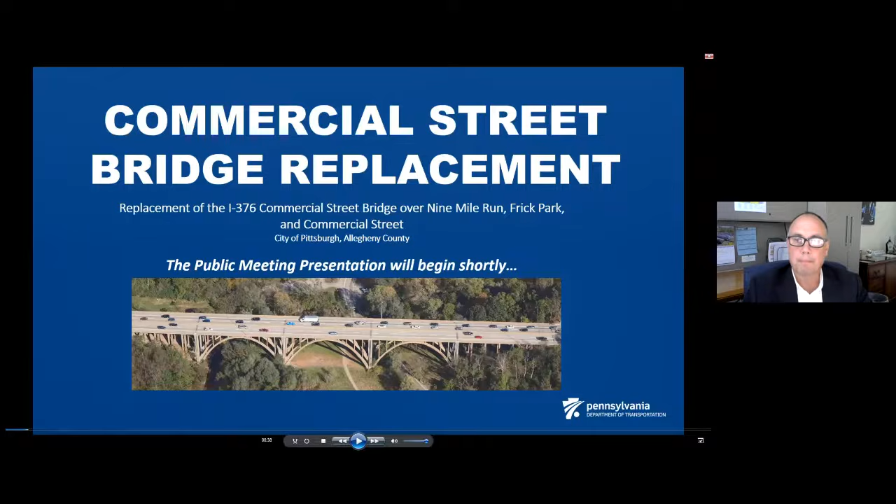Thank you, Jason, and thank you everyone for attending today. My name is John Myler. I'm a Senior Assistant Construction Manager with PennDOT District 11, and I will be overseeing this project throughout construction to ensure it's built properly to our standards and specifications.

I also want to introduce you to two other speakers you'll be hearing from today. We have Nick Burdett with HDR, our designer of record for the project. Nick's been involved in this project from the beginning, and he will continue to be involved throughout construction to answer any questions or concerns we may have when we're actually constructing the project related to the design details.

You will also be hearing from Michelle Olszewski. She's with S&B USA, who's our prime contractor for the project. Michelle will be giving you some more specific details about the construction activities that will take place on the project and the timeline and schedule for what those will be throughout the project.

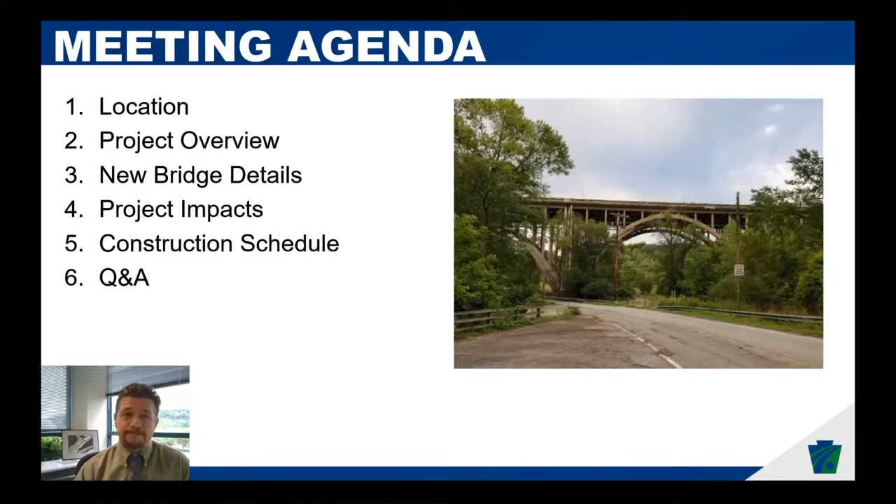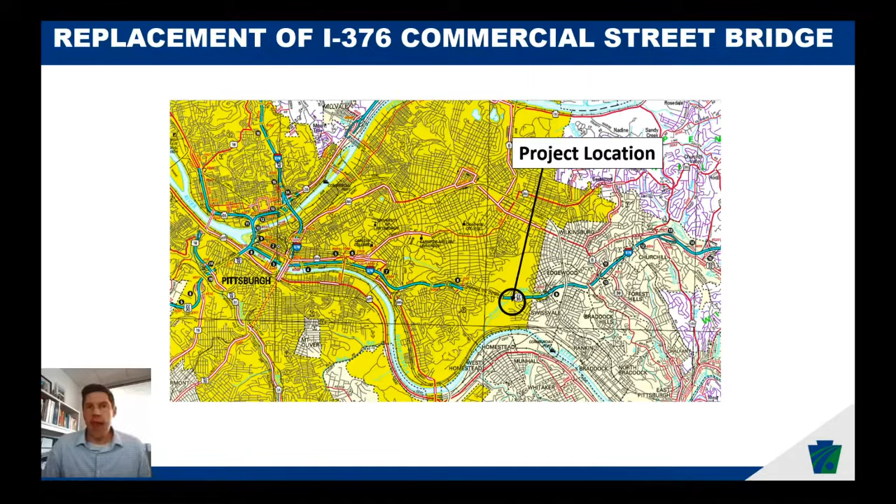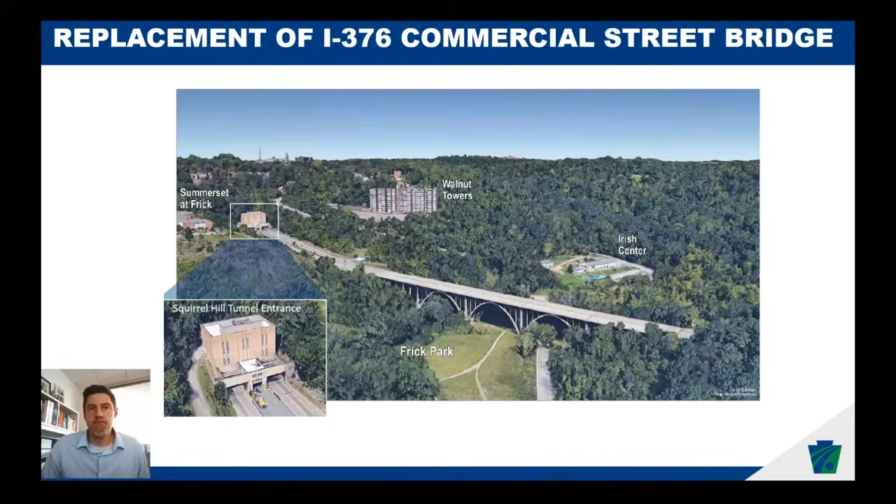I'll just provide a brief overview of the existing structure and why it's being replaced as part of this project. The existing 3-span concrete arch bridge you see here was completed in 1951, making it 73 years old. The structure carries the interstate with approximately 100,000 vehicles per day crossing the bridge. The bridge cannot carry permit loads on the interstate, so it's a real limiting factor for permit loads on this major route.

Due to its age, deterioration is accelerating and recurring maintenance costs are getting prohibitive.

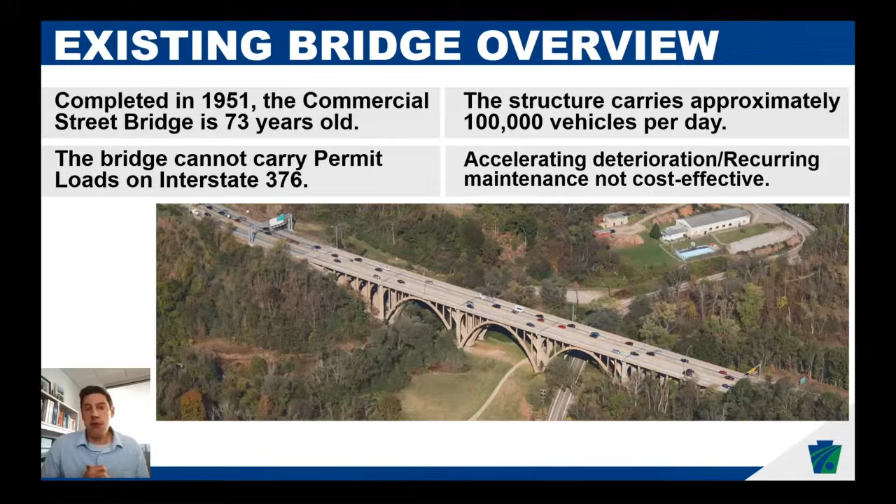The existing Commercial Street Bridge was built between 1948 and 1951. In the year 2000, it was deemed individually eligible for listing in the National Register of Historic Places by the Pennsylvania Historical and Museum Commission, due to its technological significance and aesthetic design. As a result, PennDOT has closely coordinated the proposed bridge replacement with the State Historic Preservation Office and other consulting parties. PennDOT has also coordinated with the city of Pittsburgh for tree restoration, and our project team has developed a landscape plan to ensure that Frick Park's setting is enhanced by the project. Finally, PennDOT has collaborated with the Department of Environmental Protection throughout design and will continue to do so during construction, to make sure required earth disturbance and stream encroachment mitigation measures are implemented to maintain and enhance the environmental quality of the stream and surrounding areas.

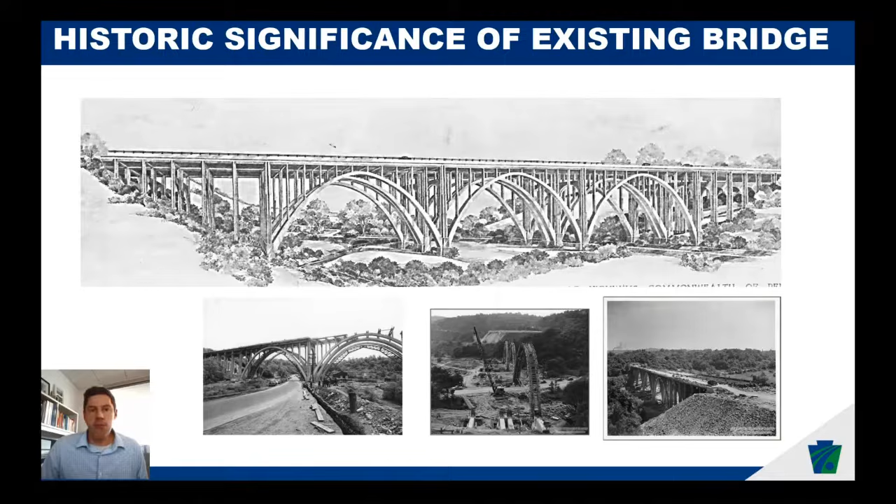As the team began to look at replacement of this significant structure, limiting impacts to traffic during construction was, of course, very high on our list. About 100,000 vehicles a day use the bridge, and how to limit impacts was a key consideration. In the end, the team looked at two different construction methods: staged construction as well as slide-in construction.

The idea with staged construction is building the new bridge in partial widths and shifting some traffic onto the bridge as we build it. For example, we might build a third of the new bridge next to the existing bridge, then demolish half the existing bridge. We then build another third of the new bridge, demolish the rest of the existing bridge, and finally complete the new bridge with another third of width.

As you can imagine, this required a great deal of shifting traffic and years of impacts to traffic. On the other hand, we looked at sliding a new bridge in. In this scenario, a new bridge would be built south of the existing bridge, fully constructed on temporary foundations, and then during a full closure of the interstate, the existing bridge would be demolished and the new bridge slid into place. Ultimately, this is the method that we decided on.

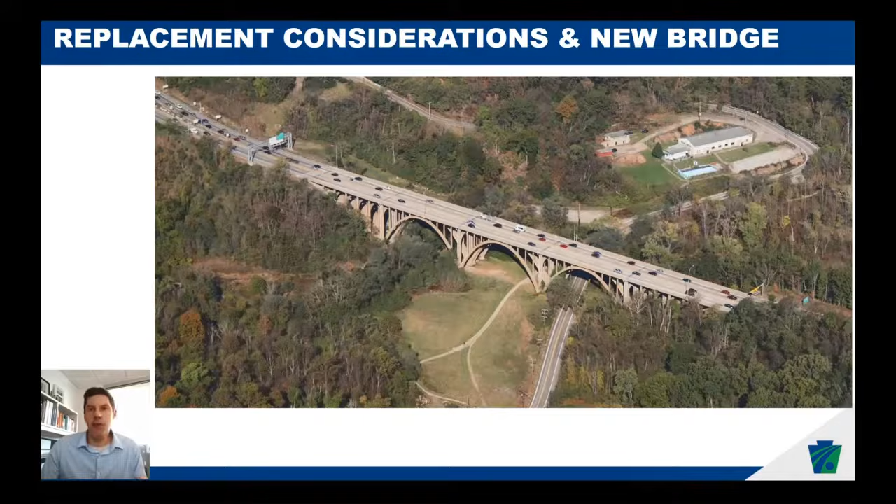In addition to the slide-in method, we evaluated a total of 6 different bridge alternates. Based on strong public desire to maintain an open arched appearance and the need to be able to slide a bridge in, we ultimately selected this arched delta frame structure for the replacement bridge.

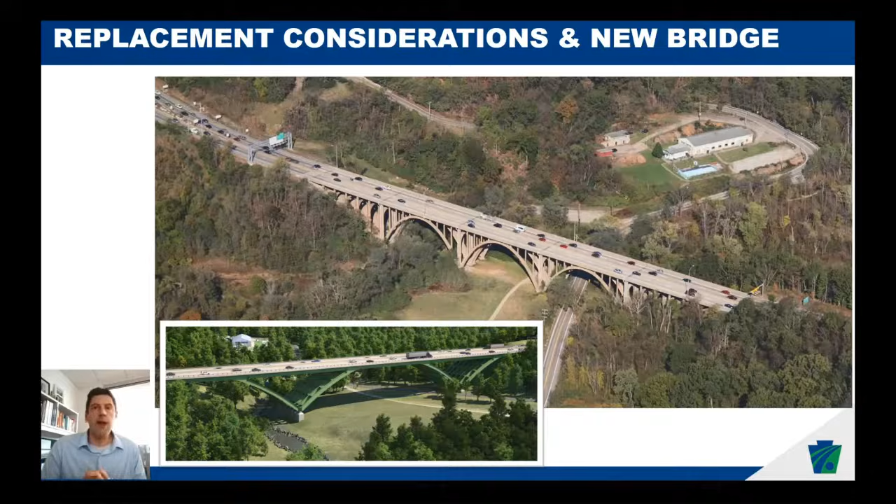I'll now say a little bit more about the slide-in construction method to help understand this method.

As I mentioned, a determination was made to proceed with a slide-in construction methodology. This was the overwhelming preference based on public input received through public and stakeholder coordination meetings in November of 2019, as well as input received through approximately 200 responses to an online survey in early 2020. It was decided to move forward with the slide-in method because of its lesser overall impact to parkway travel patterns and associated traffic disruptions.

So, to walk you through highlights of the slide-in construction method, the first step is to build the new bridge, shown here in blue, completely on temporary foundations south of the existing bridge, while 2 lanes of traffic are maintained in both directions on the existing bridge.

Once the new bridge is ready to be slid into place, the parkway will be fully closed in the summer of 2026 for approximately 3 weeks. Using a combination of conventional and explosive demolition, the existing bridge will be removed and the new bridge slid into place on new foundations.

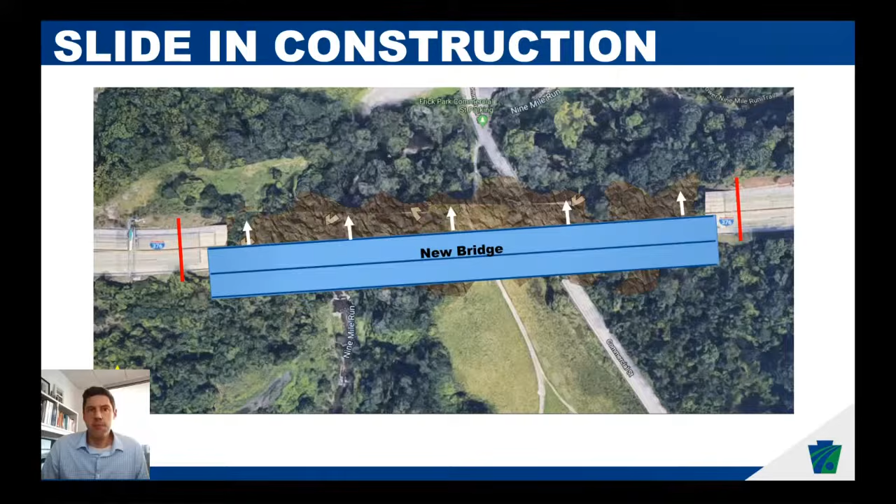Once the new bridge is tied in at both ends to the existing roadway, traffic can be reopened with 2 lanes of traffic again moving in each direction across the new bridge. As a final phase, the debris beneath the bridge will be removed and the site restored.

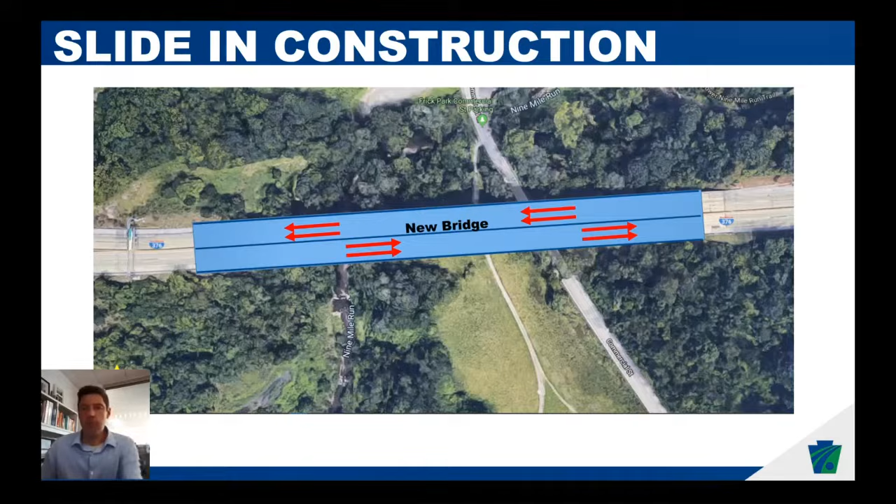Building the bridge to the south will have limited impacts to some of the elements underneath the bridge. This image shows a temporary realignment of Commercial Street under the interstate bridge, which will be required for up to 2 construction seasons due to the need to build one of the temporary foundations within the existing Commercial Street pavement area. The 9-mile run trail beneath the bridge will remain open as much as possible, but portions of the trail will need to be temporarily relocated during construction to ensure the safety of the Frick Park trail users.

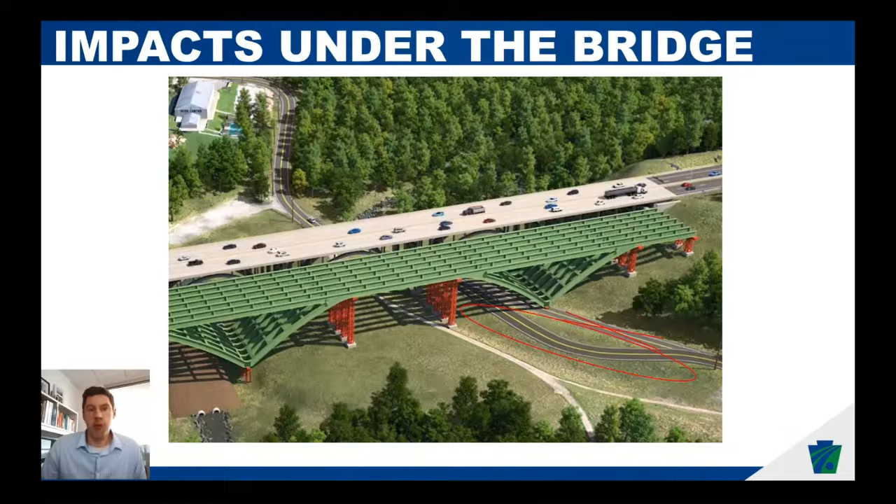Before the bridge is slid into place, there is some important work on both approaches that is also included in this project. The roadway widening on the approaches will require some temporary lane closures to allow the construction of a large retaining wall southwest of the existing bridge on the eastbound side, as well as the foundations for 2 new sign structures. However, the overall impacts and traffic disruptions to the traveling public for this work will still be far less through the proposed slide-in construction process.

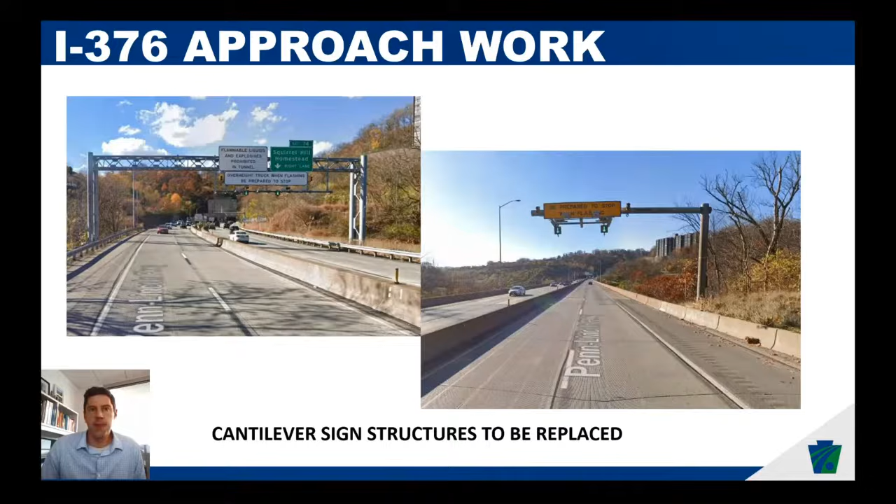PennDOT has prepared a brief video that will walk through in more detail the anticipated construction sequence for this unique project.

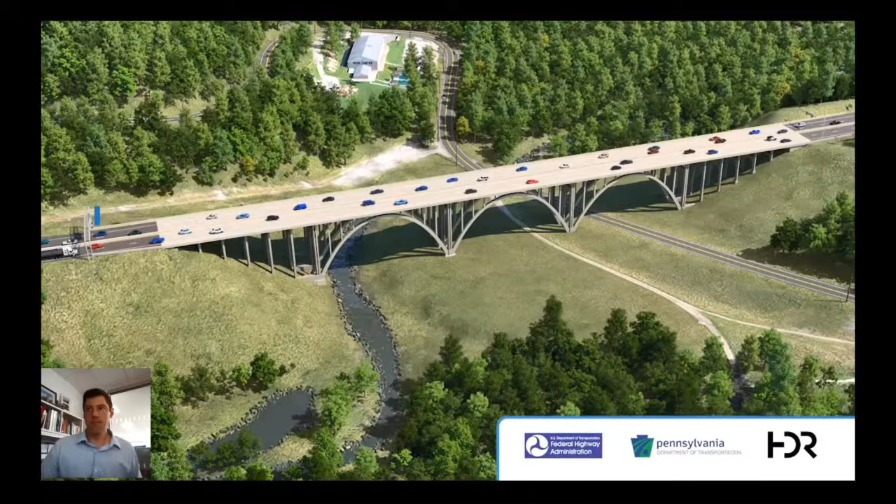Here you can see the bridge just to the east of the Squirrel Hill tunnels, crossing over Frick Park, Commercial Street, and 9 Mile Run.

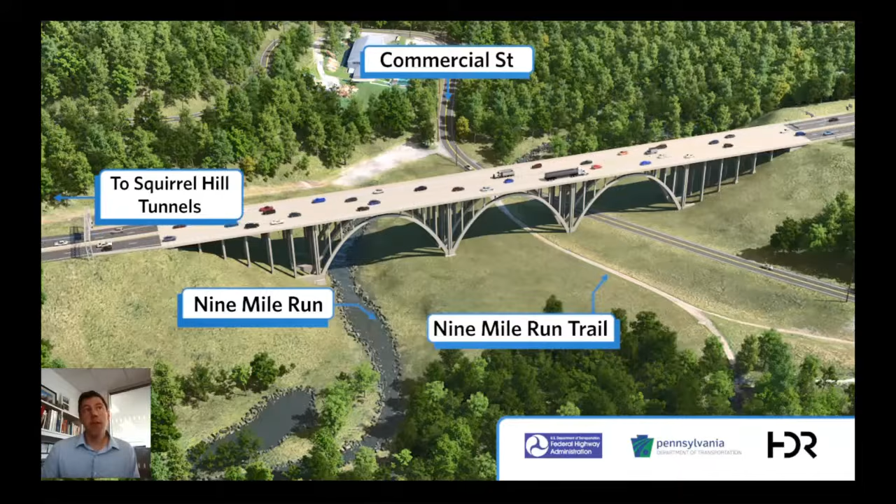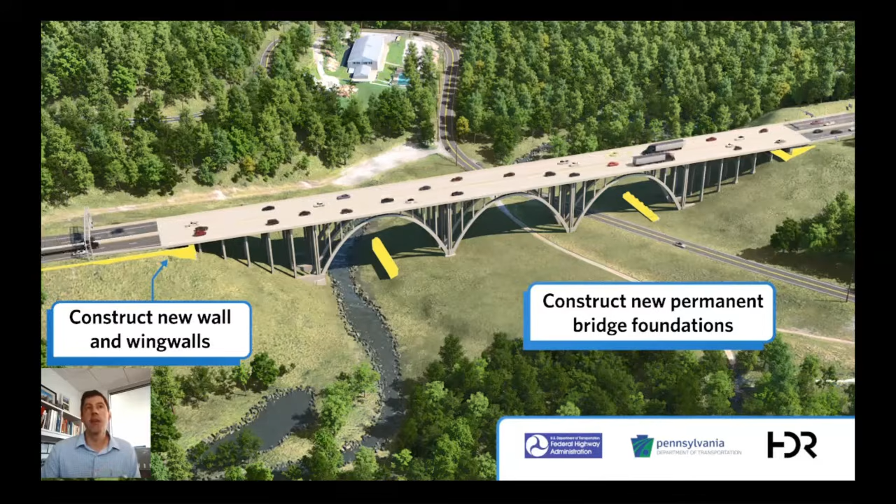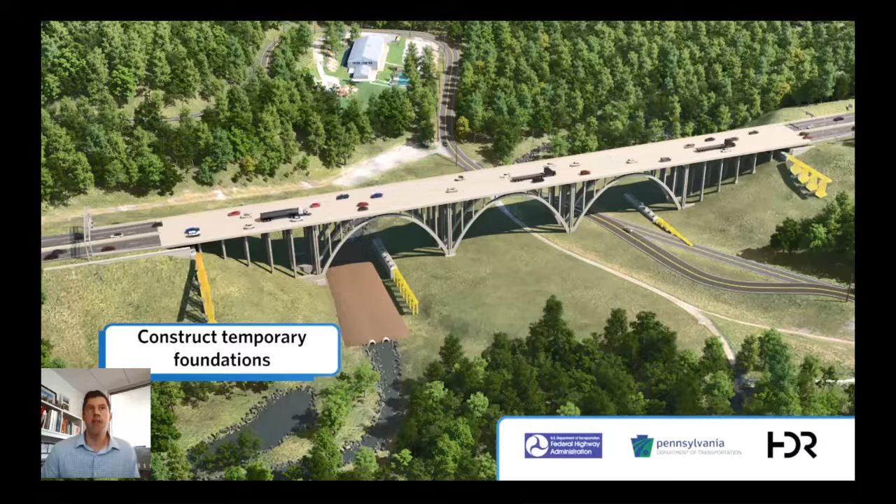Early construction tasks include building new foundations and wing walls beneath and next to the existing bridge, as well as a temporary causeway to access both sides of 9 Mile Run while protecting the stream from debris and pollutants. As mentioned earlier, Commercial Street and the 9 Mile Run trail will be realigned where it passes beneath the bridge so it doesn't conflict with the temporary foundations.

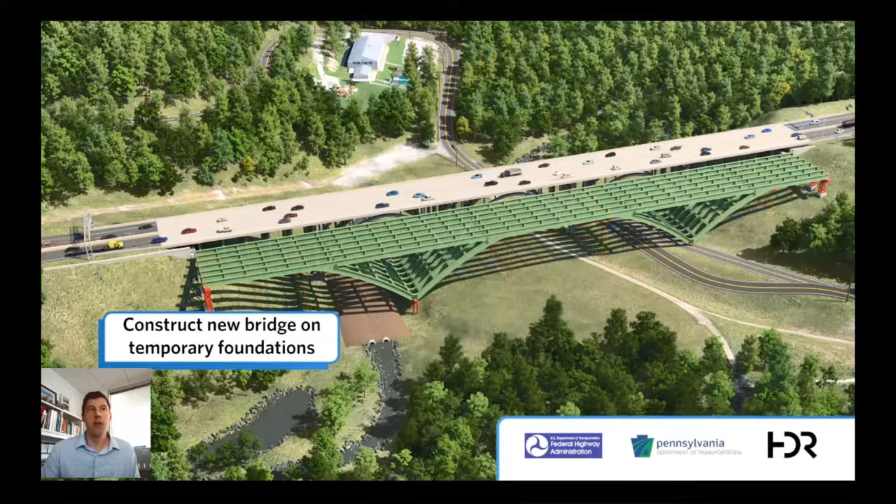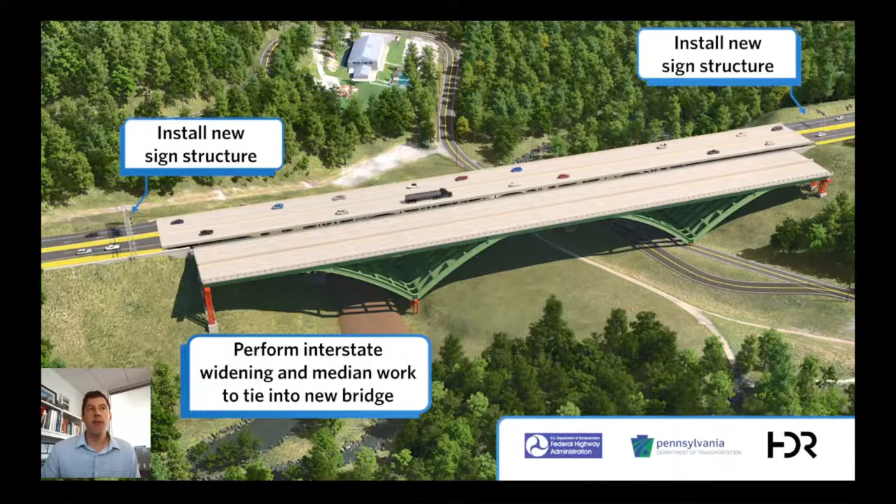The new bridge will then be constructed on the temporary foundations, first the steel as shown, and then a concrete bridge deck will be poured on top. The new bridge will have wider shoulders to meet current design criteria, and to accommodate these, wider pavement and overhead signs will be required on both ends.

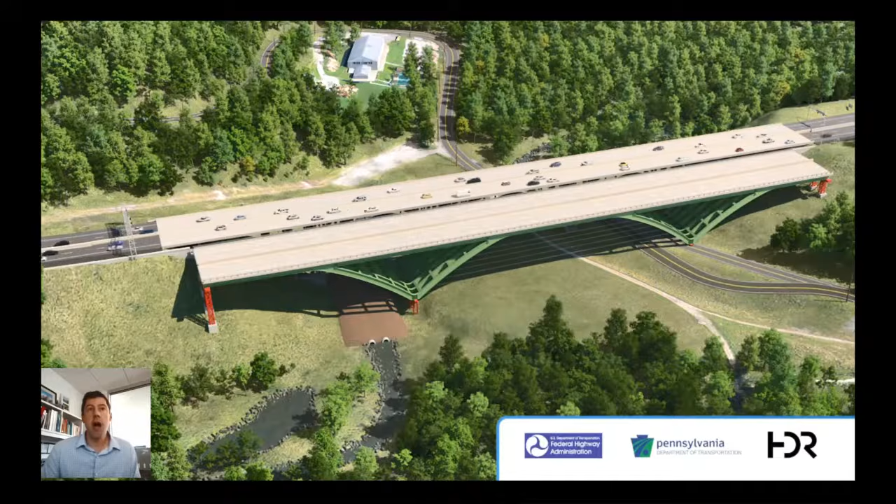Commercial Street and the Frick Park Trail below the bridge will be closed to vehicular and pedestrian traffic in advance of the complete closure of the parkway. Installation of temporary tie cables and bracing is anticipated to stabilize the bridge during the slide.

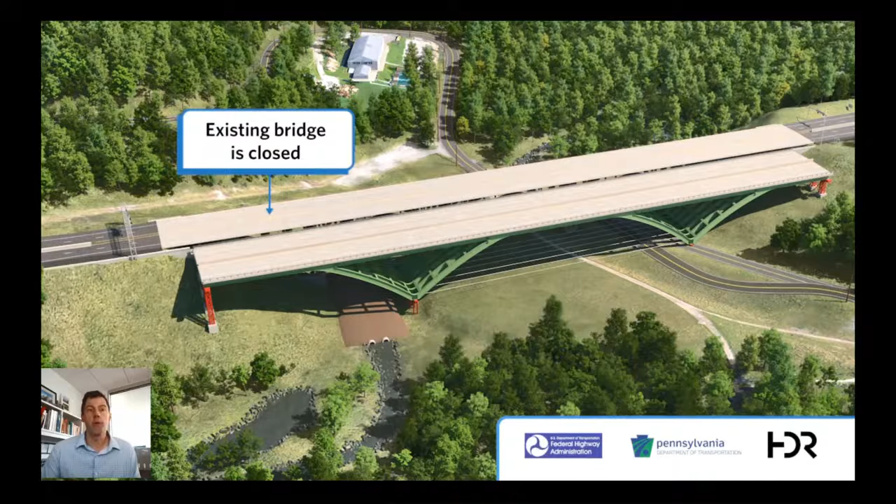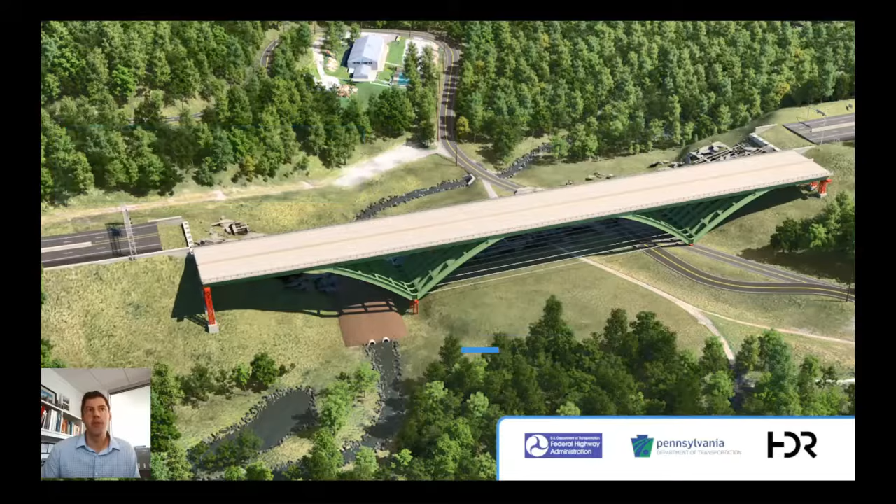When the new bridge has been prepared for sliding, the parkway will be closed to traffic. The construction contract provides 25 days for this closure. During the closure, the existing bridge will be removed through a combination of conventional and explosive demolition.

After the debris has been removed around the new foundations, it'll be slid into place. Now we'll zoom in on one of the bridge approaches. The construction of the approach tie-ins at each end of the new bridge will be expedited using precast concrete pieces and high early strength concrete to connect them together.

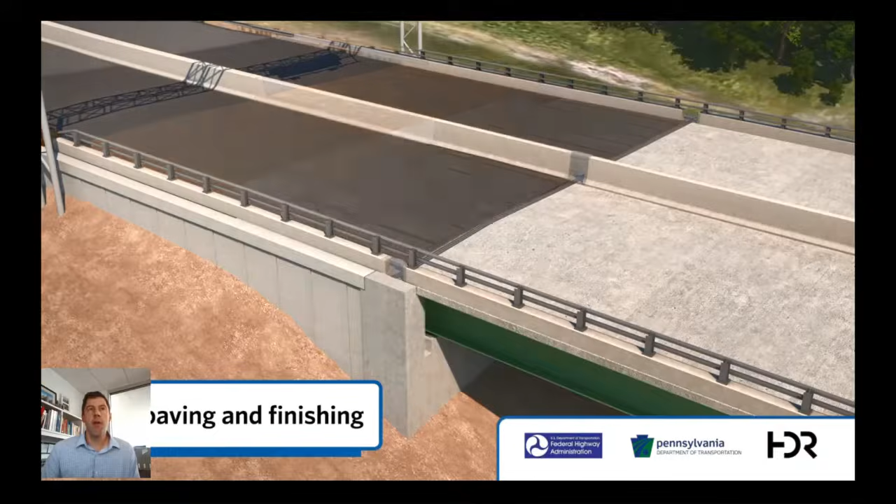The new bridge can be slid into place, and then additional precast and high early strength concrete will be used to accelerate the construction, which is a common practice. Once this approach construction work is complete and the roadway has been fully reestablished, the parkway will be once again opened to traffic.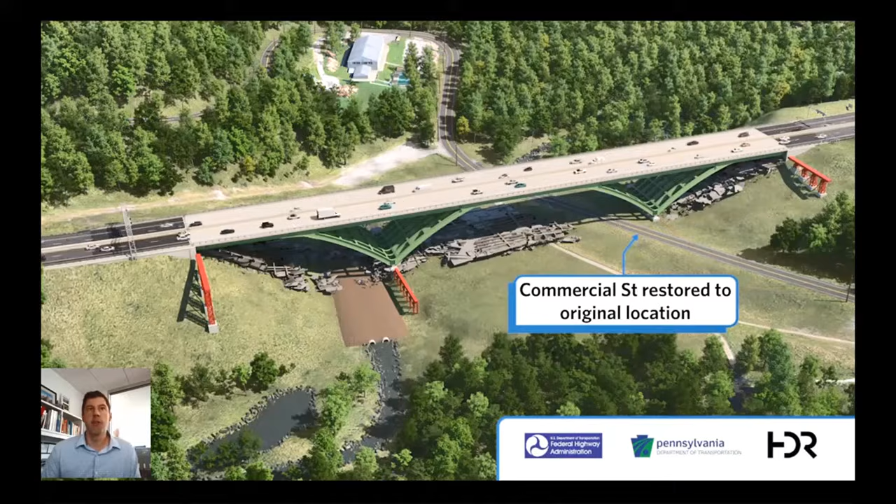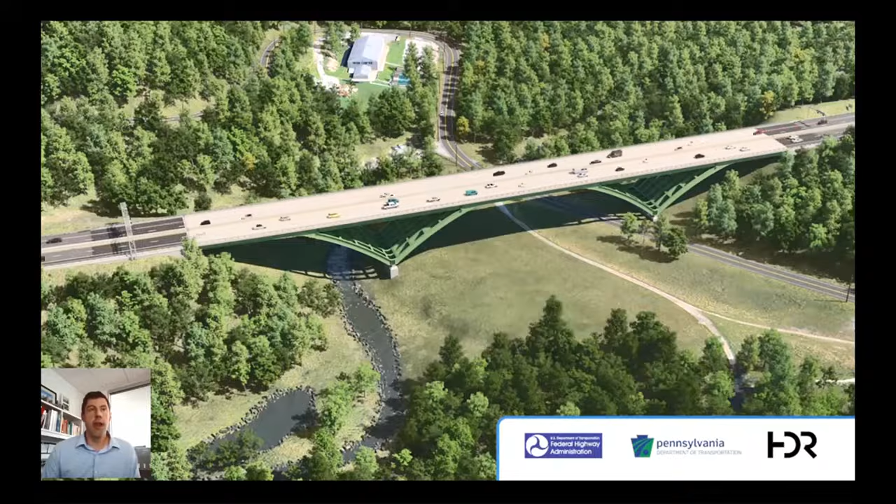With traffic back on the bridge, the contractor can focus concurrently below the bridge on restoring Commercial Street to its original alignment, continuing to remove the debris remaining from the demolished bridge, and removing the causeway to restore 9 Mile Run stream to its previous condition. In addition, a tree restoration plan will ensure that any trees removed to construct the new bridge will be replaced on a one-for-one basis to restore and enhance the overall Frick Park setting in the vicinity of the bridge.

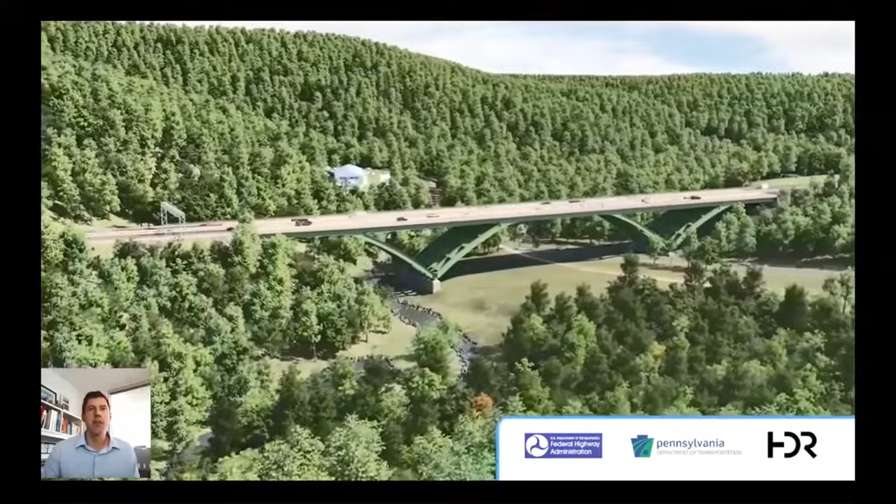Ultimately, the signature arched delta frame bridge will serve to commemorate the legacy of its concrete arch predecessor. The long spans of its steel arched frames will also provide an open, airy feel to enhance the Frick Park experience for trail users and motorists alike. The bridge color, as well as pier details, were actually selected through a public poll conducted in 2023.

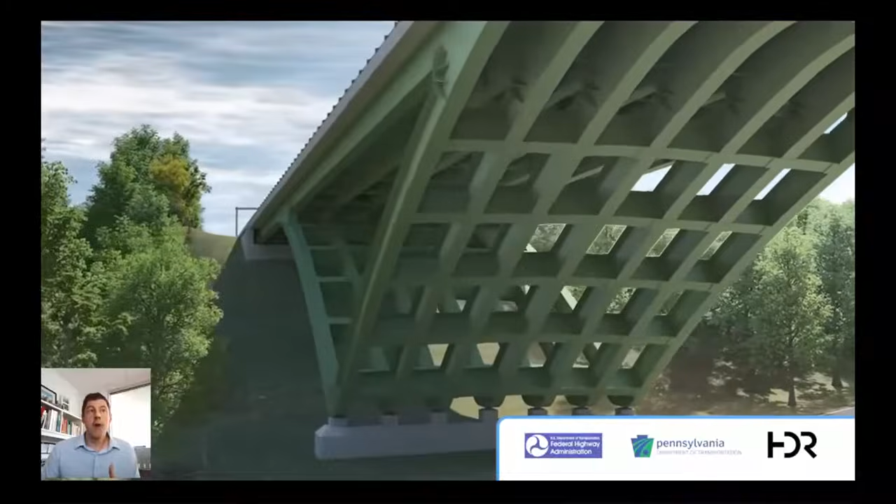Up above for motorists, the new bridge will provide wider medians and outside shoulders to meet current criteria, improving safety and functionality of the bridge. With the new bridge designed for at least a 100-year lifespan, it'll be an attractive transportation asset to the region for generations to come.

During the complete closure of the parkway, PennDOT will closely coordinate with the City of Pittsburgh, Allegheny County, and the Pennsylvania Turnpike Commission to establish a series of local and regional detours that will mitigate the impacts of the parkway closure. Part of this mitigation plan will also involve strategic placement of police along the detour routes to help direct traffic and manually regulate signal operations during peak traffic conditions.

While we know there's no good time for a complete closure of the parkway, we're confident that through these measures, combined with lessons learned during the complete closure of the parkway undertaken during the Greenfield Bridge replacement, PennDOT can maintain reasonable traffic flow with minimal disruption during this closure.

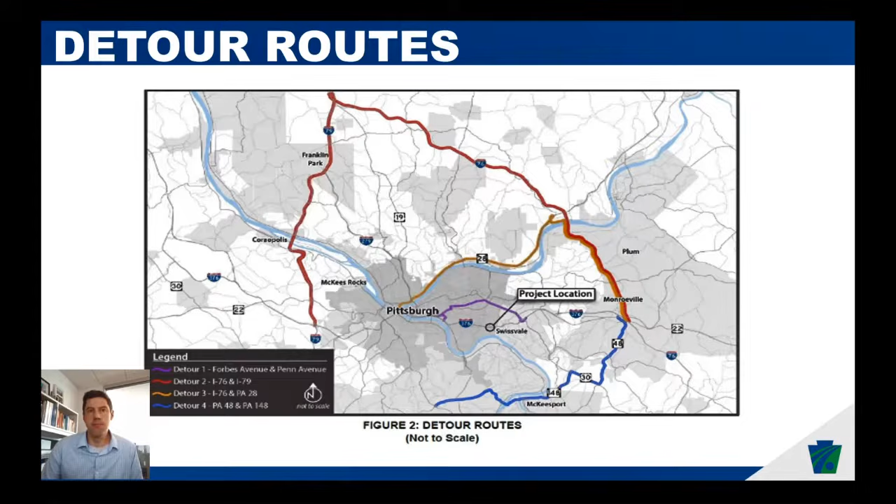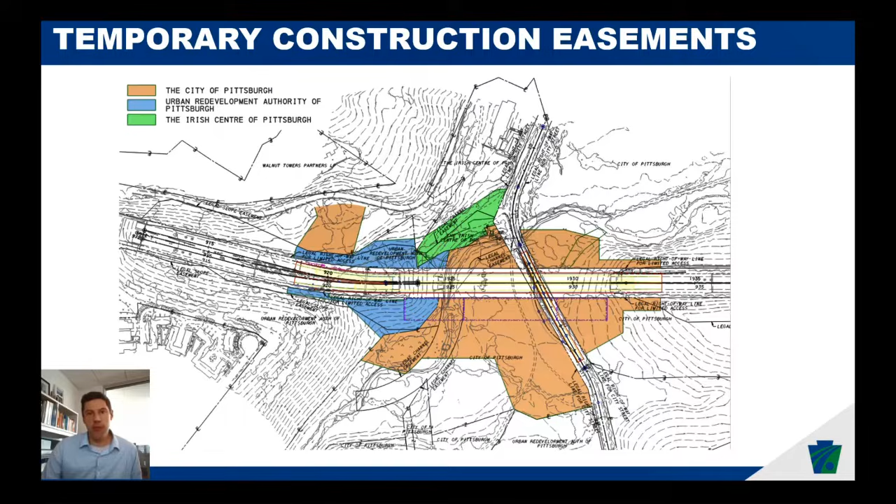PennDOT will closely coordinate with the Department of Environmental Protection throughout construction of the new bridge so that the most appropriate environmental protection measures are implemented to ensure the water quality of the 9-mile run stream is maintained.

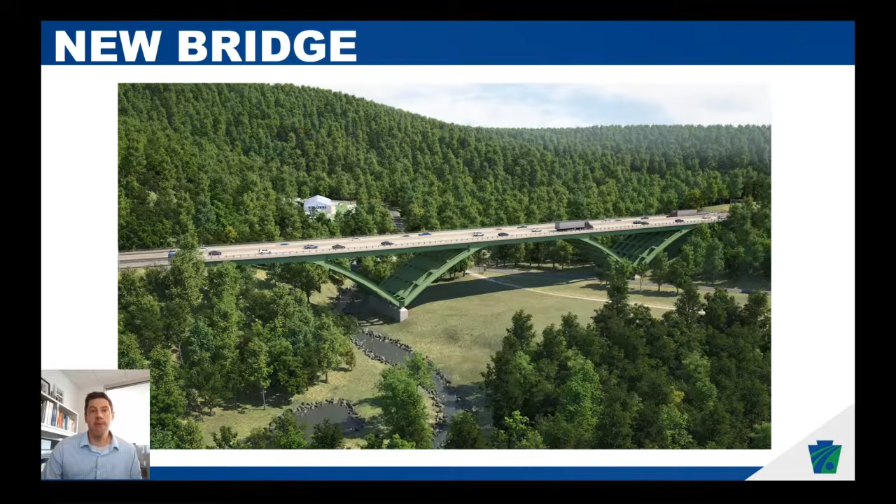In addition, PennDOT has coordinated with Frick Park and the City of Pittsburgh to develop a tree restoration and landscape enhancement plan. Proposed construction operations focus on maintaining trail access during construction as much as possible, with some need to temporarily relocate portions of the trail during construction to ensure the safety of the Frick Park trail users.

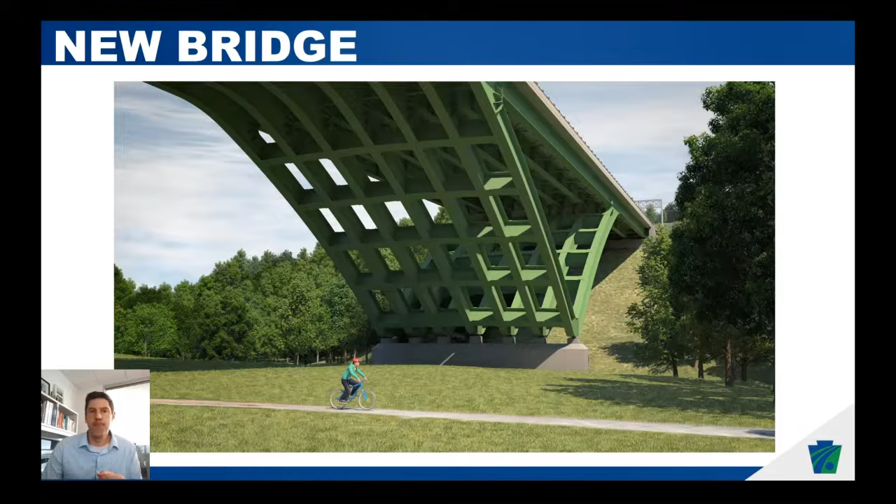Hello, I'm Michelle Shesky, and I'm a Senior Project Manager for Fay S&B USA Construction. We are the general contractor on the Commercial Street Bridge project. To give you some background on our company, Fay was founded in Pittsburgh in 1947 and has been doing regional infrastructure projects for over 75 years.

We operate throughout the Mid-Atlantic region, but have completed the majority of our projects in the Pittsburgh area, many with PennDOT and HDR. Recent projects shown include the I-579 CAP project in downtown Pittsburgh, the Jerome Street Bridge project in McKeesport, the I-79-279 rehabilitation project, the Chartiers Bridge replacement, and the Roads and Bridges project for the new Pittsburgh International Airport. We have expertise in providing value engineering and accelerated construction delivery methods.

In addition, we come to this project with extensive experience in demolition. Fay has been providing demolition services since our inception and have done many large and complex demolition projects all over the country. We are excited to be part of this historic project and hope to provide a quality product for both PennDOT and the region.

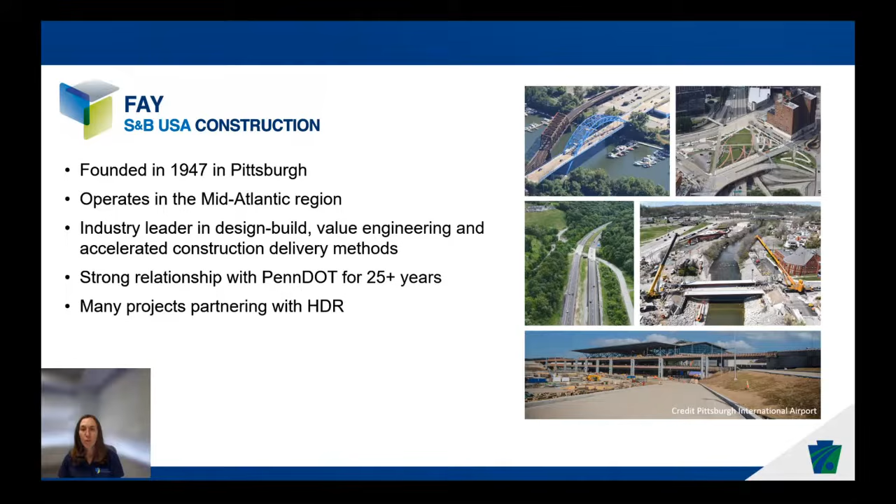I will now provide you with a brief overview of the schedule and upcoming impacts that will occur over the next 3 years. Work will begin this year in 2024.

Currently, there is advanced ramp work being done for the future detour route, requiring the closure of exit 78B for Wilkinsburg on the eastbound side of the parkway. This work will finish at the end of this week, returning the ramp to regular service.

Within the next month, you will see us begin clearing trees and brush from within the construction limits in preparation for the construction of the new bridge.

This work will result in the closure of the unofficial mountain bike trail located along the hillside of the abutment nearest the Squirrel Hill Tunnel. The trail users will be able to use the relocated 9-mile trail to cross through the construction area instead.

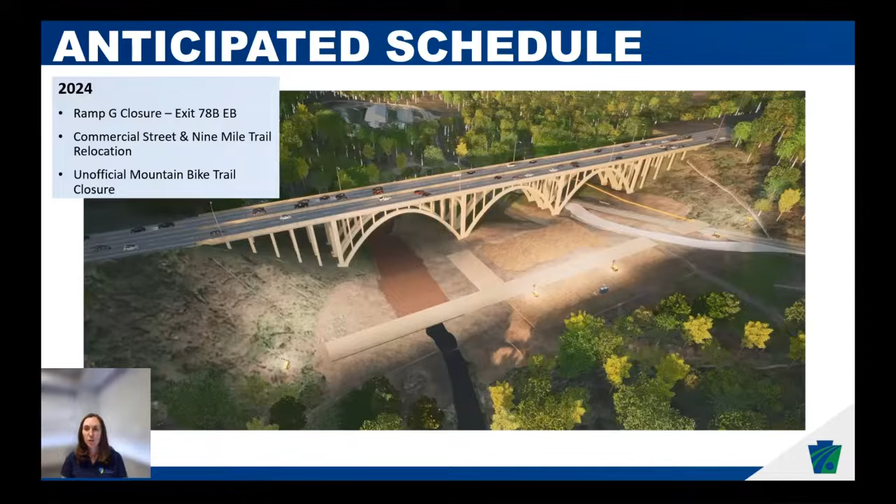In 2025, you will start to see more work taking place. We will be constructing the piers and abutments for the new bridge. This work will be done below the bridge and will not impact traffic.

There will be work for the ITS, which will require a single overnight closure of I-376 westbound from 9 p.m. until 5 a.m. We will also be implementing weeknight single-lane restrictions on I-376 eastbound from 9 p.m. until 2 p.m. the next day for the construction of a new retaining wall.

Later in the year, we will be reconstructing the median barrier for the eastern side of the tunnel. This will only result in lane shifts with no closures or impacts to the number of travel lanes.

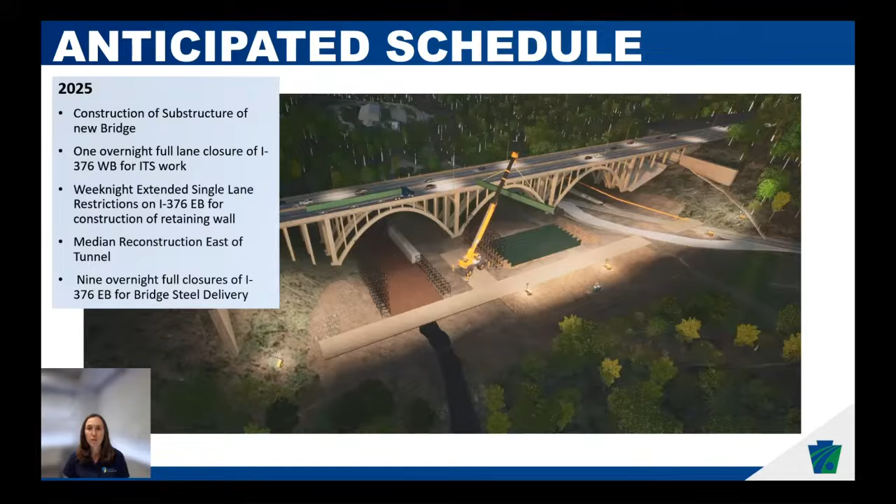Around September, there will be 9 overnight full closures of I-376 eastbound from 9 p.m. until 5 a.m. for the delivery of structural steel. These closures will allow us to lift the beams down to the work area as shown in the picture, eliminating the need to route deliveries through the local roads to Commercial Street.

In 2026, we will finish constructing the superstructure of the new bridge. You'll be able to see this from the parkway, but it will not impact traffic.

We will have 10 weekend-long single-lane closures of I-376 eastbound for shoulder widening, occurring from 9 p.m. Friday until 5 a.m. Monday. Similarly, we will also have 1 weekend-long single-lane closure for the westbound side.

We will also be installing new overhead sign structures and ITS, which will require 1 single full weekend-long closure of both I-376 eastbound and westbound. This outage will occur from 9 p.m. Friday until 5 a.m. Monday.

And finally, the largest impact, and probably one that everyone is waiting for, will be the full closure of the parkway in both directions from interchanges 74 to 77. This will occur in July of 2026, lasting for a duration of 3 to 4 weeks. During that time, we will be demoing the old bridge and sliding the newly constructed bridge into place.

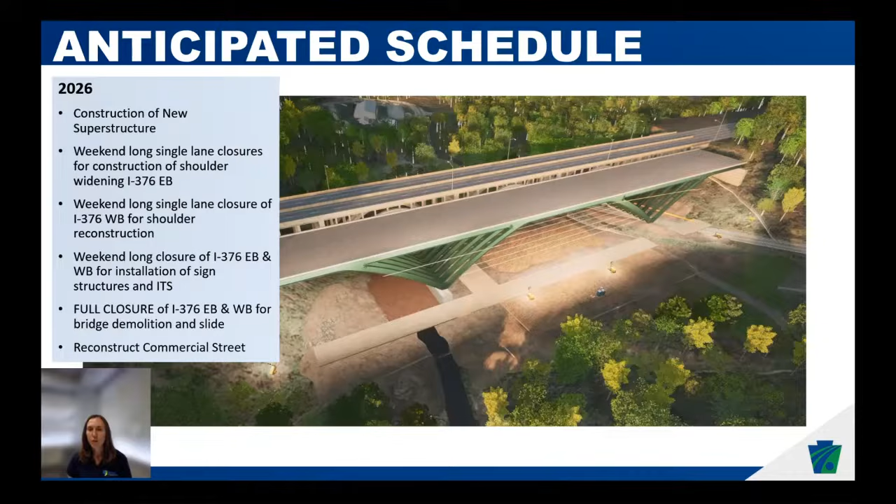At the end of the shutdown, the public will have a brand new structure to travel on, with all lanes open in both directions. Later in the year, we will also relocate Commercial Street and the 9-mile trail back to their original locations. In 2027, the majority of the construction will be complete.

We will have some final grading to do around the new structure. We will also reestablish the stream, install new stormwater management structures, and complete the new plantings of trees and grass, restoring the area back to a green space.

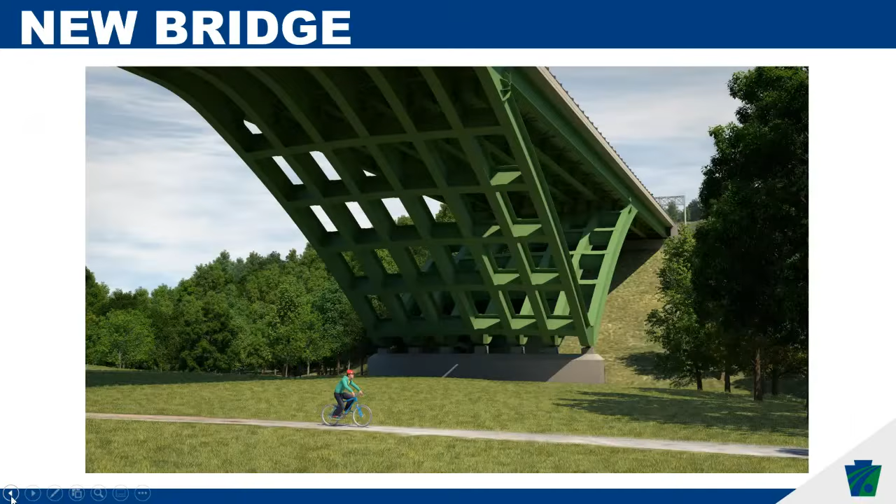We also have posted detours to try and keep folks from even getting to that point along the turnpike and those areas, to encourage folks to take the turnpike to Route 28 and come in on Route 28. We also have some farther out detours, so things like the airport, to continue on the turnpike out to 79 as well.

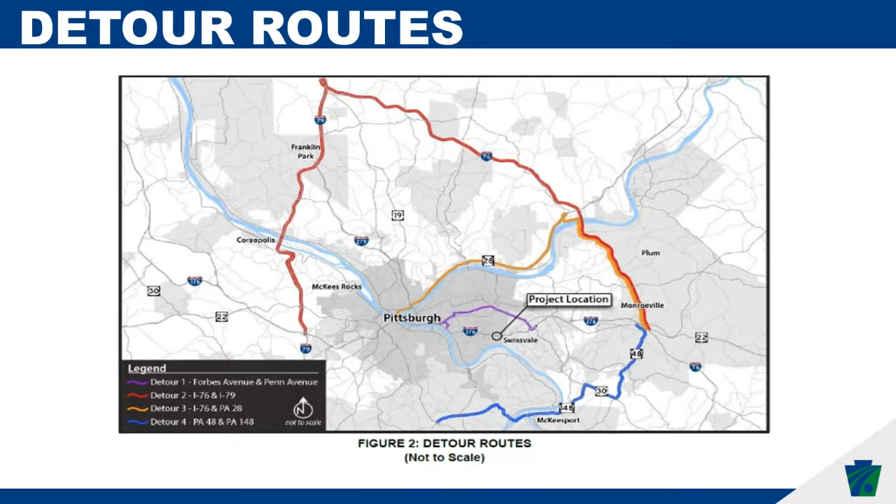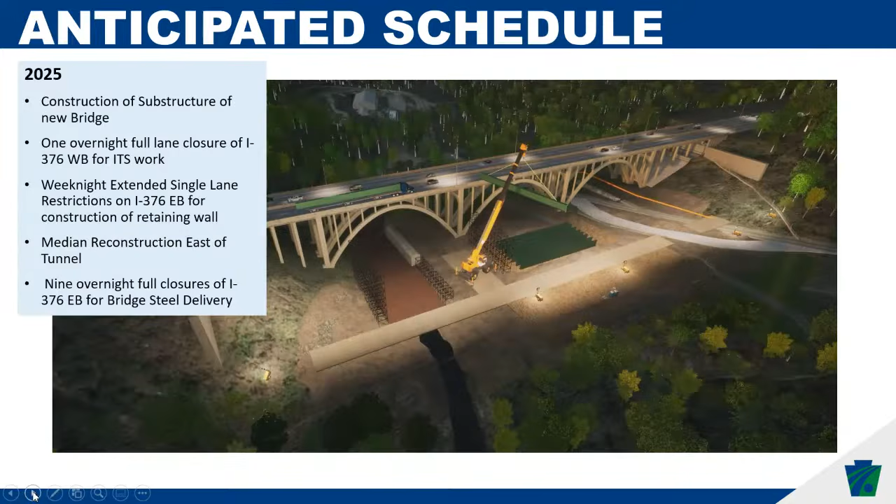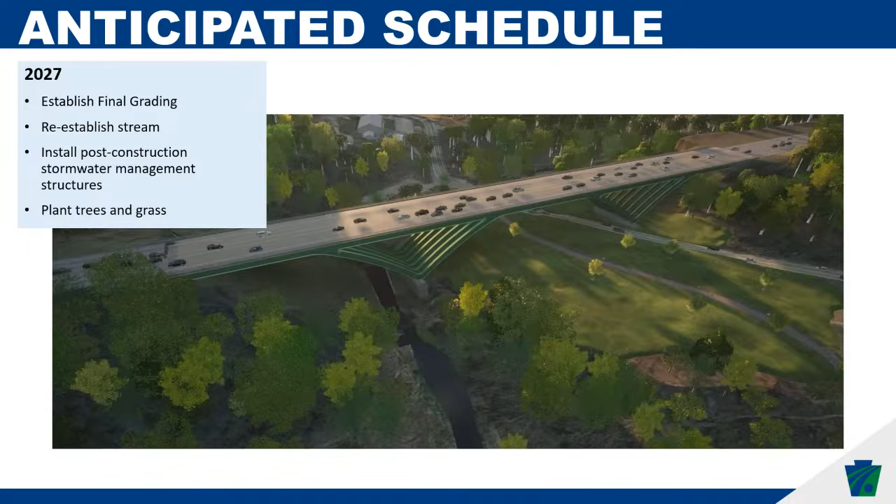Another question just came in: are you using locally made steel? We're using domestically made steel, so that'll be coming in, but it will not be made locally. Some of the smaller pieces will be made locally, but the structure itself is domestic to the United States, but will not be made locally.

I think that's the last question for now, unless we get a few more. Even though the official detour will be Wilkinsburg and Oakland exits, is there anything to keep mapping services from routing people to other exits? Yes, so we can work with those different mapping services to ensure they know what our detours are. We have great interaction with them for our various closures and getting those put into systems. So working with them to encourage motorists to use that posted detour is something that we can certainly work with them on and encourage.